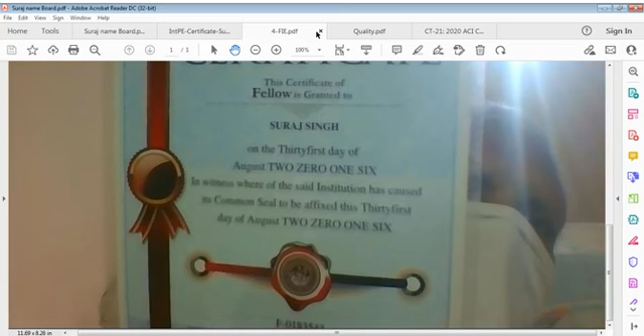And here is my quality file. I closed the C file and I closed the FI file, and I am here on the quality file. We discussed yesterday at length, but there is no end to this kind of file, because this reminds me every day. This reminds me and I remind you, and reminding objective is very important, because engineer means quality personnel.

Try to understand my point. When particularly I say engineers, this means a person with quality. Otherwise there does not exist any meaning to be called or named engineer. If a doctor, we call medical doctor, who is also a person of high quality. If a doctor cannot think of health of people, or doesn't think that medical service is a service, or it's a business - one of the two. When a doctor enters into business, in that case I cannot comment. But when a doctor serves as a professional for its patients, in that case I can say it's a quality doctor. Quality means highest character in profession. When I say quality engineer, it means highest profession, highest professional in engineering.

Quality is a term applied generally all over the world, and character is a term we can say is at a personal level. After all, every professional is personal first and then professional later on. So what is the position of your being personal is very much important, or you can say it can be used as measurement of your capability.

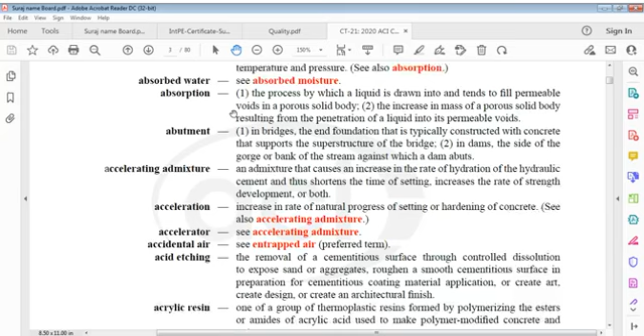Abrasion damage, abrasion resistance, absolute volume, absorbed moisture, absorption, abutment, accelerating admixture, acceleration, accelerator, accidental air - that is entrapped air - acid etching, and then acrylic resin, active crack addition, and then addition, adhesive, adiabatic, admixture, adsorbed water.

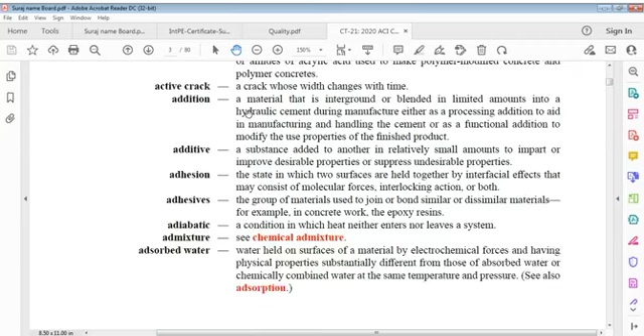Its molar or mass ratio of aluminum oxide Al2O3 to iron oxide Fe2O3 as in Portland cement. We have Abrams' law, which is a law stating that for given concrete materials and conditions of test, the ratio of amount of water to amount of cement in the mixture determines the strength of concrete, provided the mixture is workable.

Same way, as I say, abrasion damage is the wearing away of a surface by rubbing and friction, and abrasion resistance is the ability of a surface to resist being worn away by rubbing and friction. There is absolute volume: in the case of solids, the displacement volume of the particles themselves, including their permeable and impermeable voids, but excluding space between particles. In the case of fluids, the volume.

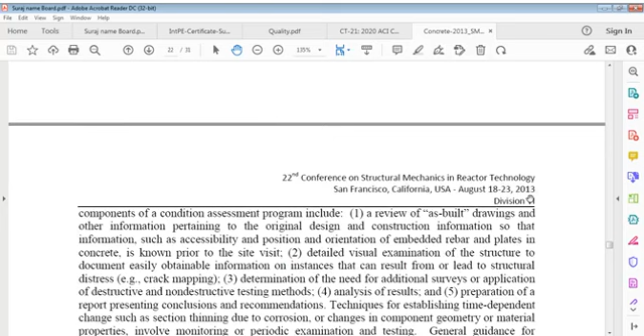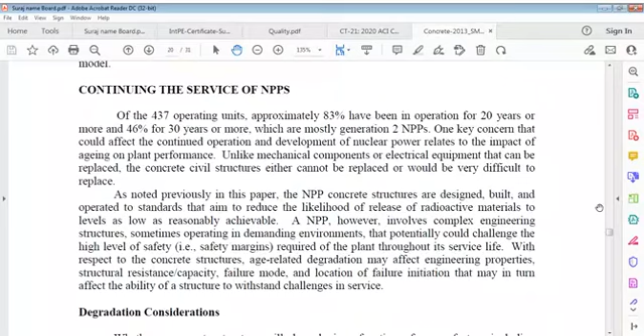It was not fully discussed because it's regarding quality of concrete, and we had a chance to look at it. I think we are somewhere here, continuing service of NPPS, continuing service of NPPS. So, degradation considerations, let's see what it was.

Thus, whether a concrete structure degrades is a function of many factors.

Let me switch off my battery so that this works safely, and then I'll listen up, please.

Cold, really, very cold. I did not show you the temperature, but it is normally not very good. It's really difficult for me to digest right now. Maybe not for you, but for me it is difficult. And 5 degrees, oh my god.

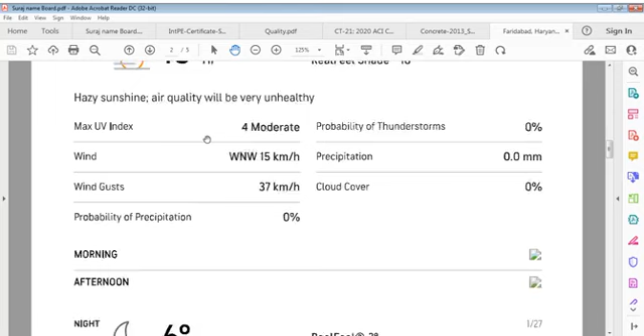12.2 kilometer is the cloud ceiling, visibility is okay, expected time in day is 18 degrees stalling, and next is 6. So currently, at this moment I'm talking to you, it's 5 degrees Celsius and feeling like 2 degrees Celsius, and that's why I was a little uncomfortable here.

And I close this. So we go through degradation considerations, and here we can say we have to find some information, concrete quality, which is really very important. Let us say what somebody says about concrete quality, how people think about it.

It simply says that quality of concrete is affected by different physical and mechanical properties of aggregate: shape, grading, durability, specific gravity, and water absorption, etc. These aggregate properties should be tested before using it for concrete production.

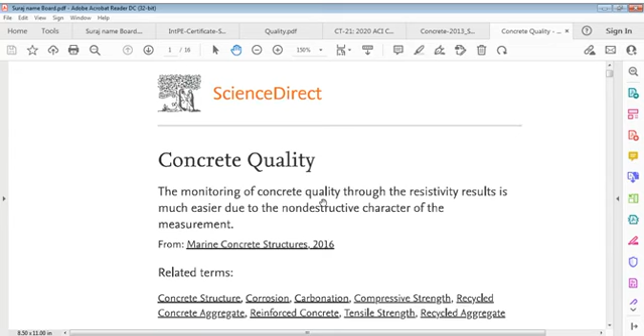Sometimes everything's not clear. Let's see here: concrete quality. Monitoring of concrete quality through resistivity result is much easier due to the non-destructive character of the measurement related terms. Okay, assessing a concrete's resistance to chloride ion ingress using formation factor.

Introduction: assessing concrete quality specifically to determine its resistance to ion ingress has gained increasing interest in recent decades.

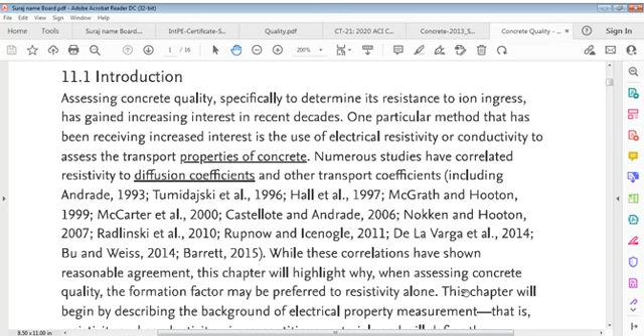One particular method receiving increased interest is use of electrical resistivity or conductivity to assess the transport properties of concrete. Numerous studies have correlated resistivity to diffusion coefficient and other transport coefficients. While these correlations have shown reasonable agreement, this page shall highlight why, when assessing concrete quality, formation factors may be preferred to resistivity alone.

This chapter begins by describing background of electrical property measurement, that is resistivity and conductivity, in cementitious materials, and shall define formation factor, a microstructural material property that describes pore network, which can then be related to diffusion coefficients of different ionic species.

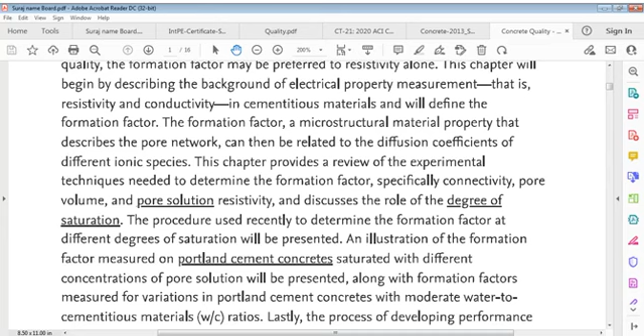Review of experimental technique needed to determine formation factors, specifically connectivity, pore volume and pore solution resistivity, and discusses role of degree of saturation, including procedure used recently to determine formation factors at different degrees of saturation.

An illustration of formation factor measured on Portland cement concretes saturated with different concentrations of pore solution is presented, along with formation factors measured for variations in Portland cement concretes with moderate water to cementitious material ratio.

Lastly, the process of developing performance ranges is discussed. An approximation utilizes surface concentration, reinforcement, cover depth, and formation factor to approximate a time to corrosion initiation. The remainder of the chapter discusses future research needs in advancing use of formation factor in specifying durable concrete materials.

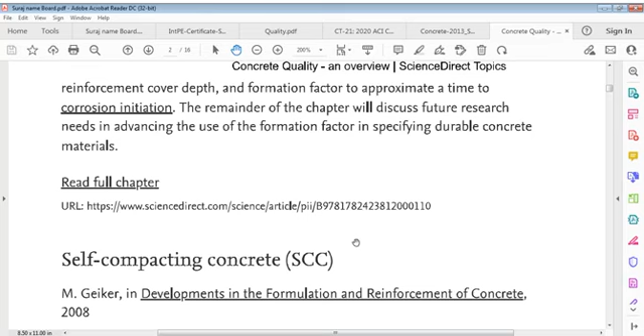Here is self-compacting concrete, Developments in the Formulation and Reinforcement of Concrete, 2008, regarding resistance to segregation.

Segregation significantly reduces concrete quality, which subsequently leads to problems during the service life of a structure. Segregation occurs when the coarse aggregates and fine aggregates separate.

Segregation is caused by differences in gravity of constituent materials.

Segregation may take place either during flow due to stress gradients, known as dynamic segregation, or as settlement due to gravity, known as static segregation. So one is due to flow of concrete and the other is due to gravity.

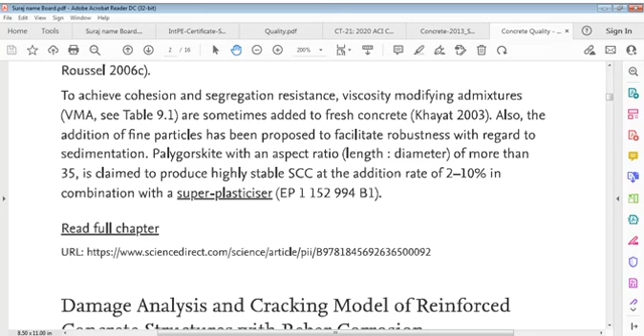Now we move to damage analysis and cracking model of reinforced concrete structures with rebar corrosion.

Effect of concrete quality: to examine the effect of concrete quality on expansive pressure, the same reinforced concrete example is used. Normally, tensile strength is considered to be a key factor in corrosion-induced cracking of concrete.

Concrete with a larger tensile strength always has a larger compressive strength, that's natural. We chose four compressive strengths rather than tensile strengths to illustrate the effect of concrete quality on expansive pressures, that is 25 MPa, 35 MPa, 45 MPa, and 55 MPa. All other parameters are the same as those mentioned.

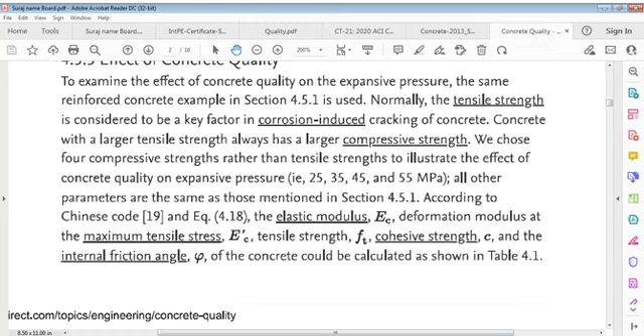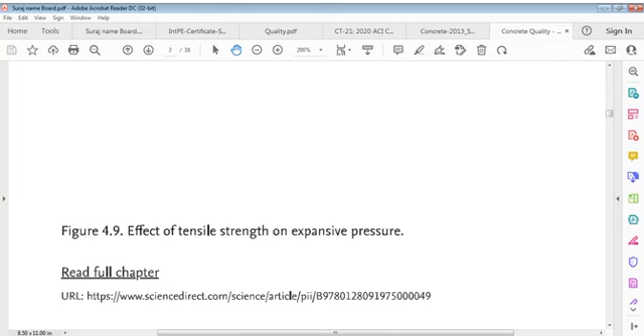Effect of tensile strength on expansive cover, that is expansive pressure. Evaluation of concrete quality using the lateral pressure test.

Evaluation in situ of concrete quality - uniformity, grade of deterioration, strength, etc. - becomes important when reinforced concrete structures present visible defects such as fissures, lack of mortar, or damage produced by fire. Evaluation of concrete in existing structures is generally made by determining compressive strength, as it reflects, directly or indirectly, most other concrete properties.

So it says that let me put up some page here. No, I can't put up this. Okay. Right. Well, so why I'm moving is here. It says

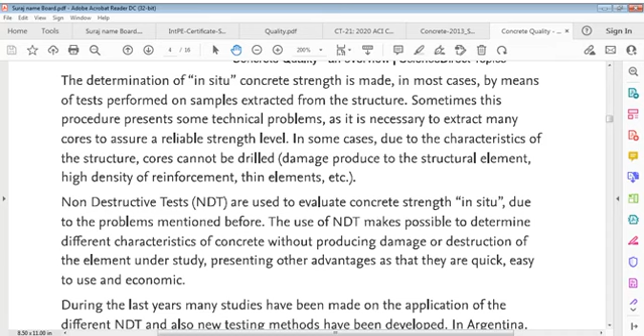Non-destructive tests (NDT) are used to evaluate concrete strength in situ due to the problems mentioned before. Use of NDT makes it possible to determine different characteristics of concrete without producing damage or destruction of the element under study, presenting other advantages such as being quick, easy to use and economical.

During recent years, many studies have been made on the application of different NDT methods, and new testing methods have also been developed. In Argentina, several NDT methods based on different theories of fracture were developed - methods of localized pressure, torsion, and lateral pressure can be mentioned.

It must be mentioned that using NDT available at present, absolute values of strength cannot be obtained. Nevertheless, some NDT methods quantify properties of concrete directly or indirectly related to mechanical strength, so strength can be estimated with errors that are acceptable.

In this paper, results of some studies performed with the method of lateral pressure are reported. Relationships between compressive strength and rupture loads quantified with NDT are established on concrete of different characteristics. Variables such as strength level, age, type of coarse aggregate, and curing of concrete are also analyzed.

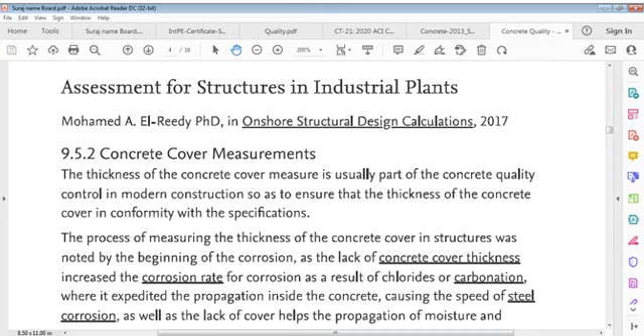Thickness of concrete cover measurement is usually part of concrete quality control in modern construction, so as to ensure the thickness of concrete cover is in conformity with specifications.

The process of measuring thickness of concrete cover in structures was noted as the beginning of corrosion control, as lack of concrete cover thickness increases corrosion rate, resulting from chlorides or carbonation, which expedites propagation inside concrete, increasing the speed of steel corrosion. Lack of cover also helps propagation of moisture and oxygen, which form the main basis for the corrosion process.

Measurement of concrete cover thickness explains causes of corrosion and identifies areas that have the capability to corrode faster.

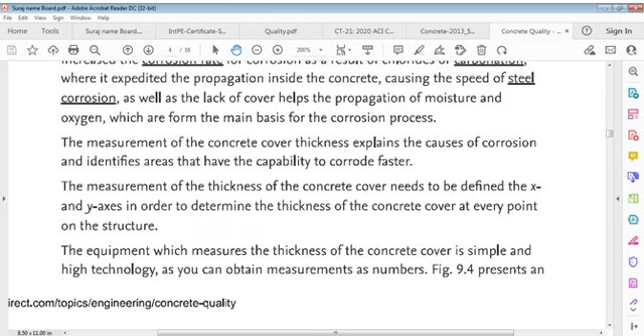Measurement of thickness of concrete covers needs defined x and y axes in order to determine thickness of concrete cover at every point of the structure. The equipment which measures thickness of concrete cover is simple yet high-technology, as you can obtain measurements as numbers.

Radiographs can be used on bridges but are quite expensive. The magnetic cover method is simple, but accuracy is affected by distance between steel bars, and when thickness of concrete cover is large, it significantly influences the readings.

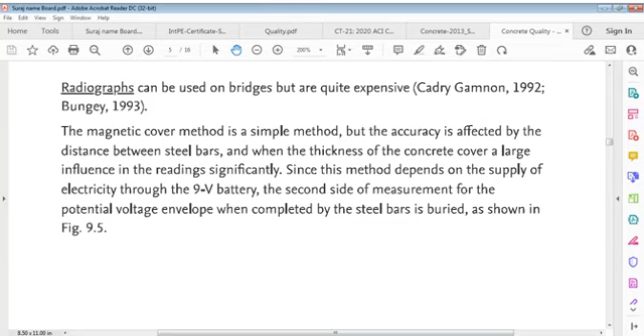Since this method depends on a supply of electricity through a 9-volt battery, the second side of the measurement for potential voltage envelope, when completed by steel bars, is buried as shown.

Device location on concrete surface shall increase accuracy of reading. Small head has an impact on accuracy of equipment.

Problem with this method is in case of dense steel reinforcement in concrete section, which gives non-accurate data. In this case, equipment shall be calibrated based on existing steel bars, as reading is affected by type of steel. Person who works on equipment must be competent and aware of whatever can affect reading, such as bolts, steel wires.

Sustainability of concrete.

Other approaches for improving sustainability described above are all perfectly feasible with our current understanding and technology at modest cost. However, there are a number of other strategies that might also be followed. These are not necessarily fully developed as yet, and may not be economically viable at this stage, but form at least a part of the roadmap for the future.

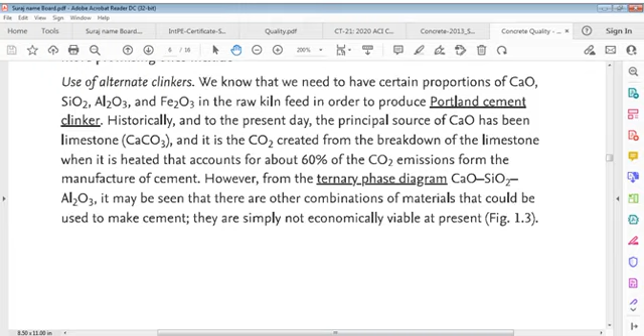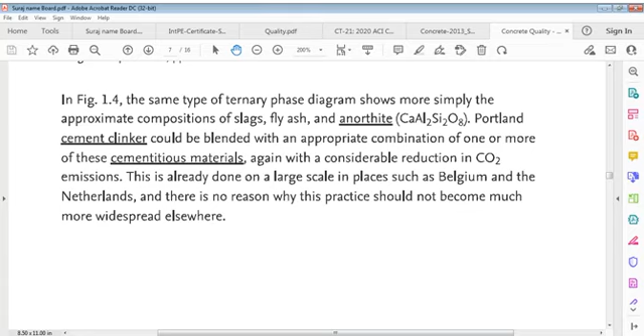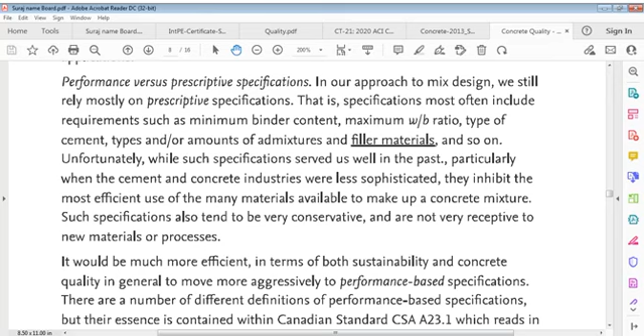Performance versus prescriptive specifications. In our approach to mix design, we still rely mostly on prescriptive specifications. That is, specifications most often include requirements such as minimum binder content, maximum water binder ratio, type of cement, types and/or amounts of admixtures and filler materials, and so on. Unfortunately, while such specifications served us well in the past, particularly when cement and concrete industries were less sophisticated, they inhibit the most efficient use of many materials available to make up concrete mixtures. Such specifications also tend to be very conservative and are not receptive to new materials or processes.

It would be much more efficient in terms of both sustainability and concrete quality in general to move more aggressively to performance-based specifications. There are a number of different definitions of performance-based specifications, but their essence is contained in the Canadian Standard CSA A23.1, which reads in part.

A performance concrete specification is a method of specifying a construction product in which the final outcome is given in mandatory language in a manner that performance requirements can be measured by accepted industry standards and methods. Processes, materials, or activities used by contractors, subcontractors, manufacturers, and material suppliers are then left to their discretion. The intent is clear: prescribe required properties of both fresh and hardened concrete, but without saying how they are to be achieved.

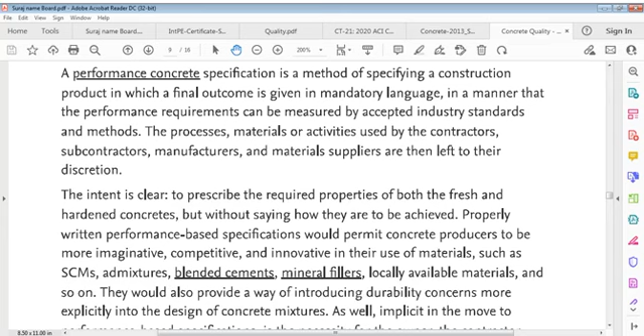Properly written performance-based specifications would permit concrete producers to be more imaginative, competitive and innovative in their use of materials, such as SCMs, admixtures, blended cements, mineral fillers, locally available materials, and so on. They would also provide a way of introducing durability concerns more explicitly into the design of concrete mixtures, as well as implicit in the move to performance-based specifications is the necessity for owner, contractor, and material supplier to work together.

Owner specifies required properties which could even include a carbon footprint. Supplier assumes responsibility for delivering appropriate concrete to site, and contractor assumes responsibility for placing and curing concrete properly.

Environmental degradation of reinforced concrete.

Low permeability concrete is a good one if low permeability is what's desired.

Traditionally, the first step in improving durability of reinforced steel involved improving concrete quality. For example, ACI 318 and ACI 357 recommend a water to cement ratio of 0.4 or under, and minimum cover of 50 mm for non-marine and 68 mm in marine exposures. ACI 318 2003, ACI 357 2003, and other codes such as Euro Code 2 and Norwegian Code NS 3474 are less stringent than the 1992 Norwegian Code.

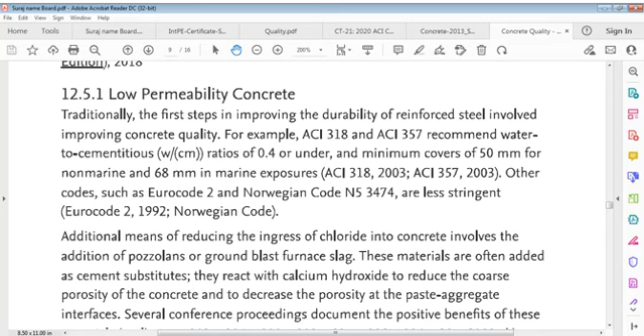Additional means of reducing ingress of chloride into concrete involves addition of pozzolans or ground blast furnace slag. These materials are often added as cement substitutes. They react with calcium hydroxide to reduce coarse porosity of concrete and to decrease porosity at the paste-aggregate interfaces.

Several conference proceedings document the positive benefits of these materials. However, numerous references show that even if concrete is produced to the most stringent of codes, chloride shall still ingress into concrete and corrosion of steel reinforcement shall initiate.

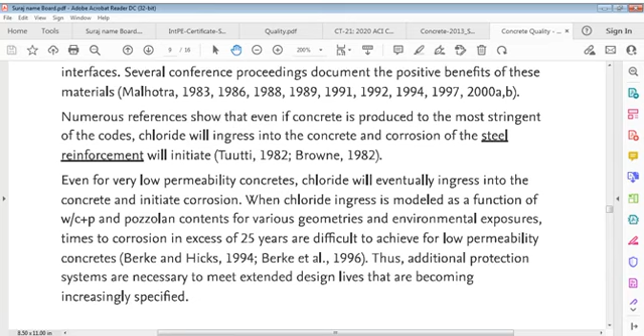Design and engineering of biogas plants: reactor material and protection. Digestion tanks of reinforced concrete and steel are most widely used.

Reinforced concrete tanks benefit from the high tensile strength of steel and the high compressive strength of concrete. Appropriate concrete quality, blast furnace cement with low lime content, and professional construction are important to prevent corrosion and leaks in tank walls.

Concrete digesters can be built partially or completely in the ground. Steel digesters are built on concrete foundations above ground. Steel plates are welded or bolted together and seams are tightened. For parts in contact with corrosive fluids, highest quality stainless steel is recommended. Glass-coated or galvanised steel is used when there is no risk of corrosion.

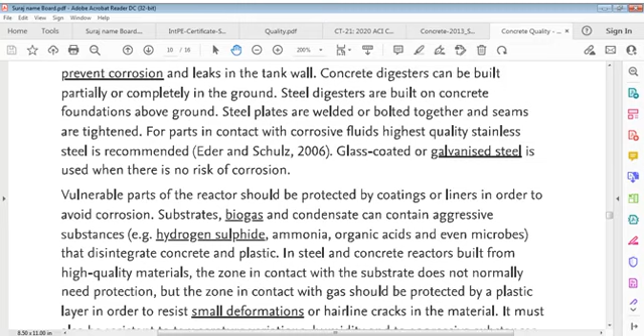Vulnerable parts of the reactor should be protected by coatings or liners in order to avoid corrosion. Substrates, biogas, and condensate can contain aggressive substances, namely hydrogen sulfide, ammonia, organic acids, and even microbes that disintegrate concrete and plastic.

In steel and concrete reactors built from high quality materials, the zone in contact with substrate does not normally need protection, but the zone in contact with gas should be protected by a plastic layer in order to resist small deformation or hairline cracks in materials. It must also be resistant to temperature variations, humidity, and aggressive substances that may be present within reactors.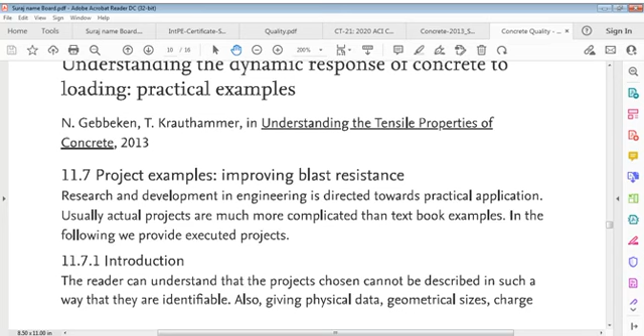Understanding the dynamic response of concrete to loading: practical examples. Project examples include improving blast resistance. Research and development in engineering is directed towards practical application. Usually, actual projects are much more complicated than textbook examples. In the following, we provide executed projects.

Our reader should understand that the projects chosen cannot be described in such a way that they are identifiable. Also, giving physical data, geometrical sizes, charge weights, or concrete quality is avoided. These examples show the practical importance of concrete material for protective structures, including mitigation of explosive effects using sandwich walls.

Mitigation of explosive effects using sandwich walls. This project had two objectives: firstly, to assess an existing building, and secondly, if necessary, design it to be blast resistant. For the existing building, the threat level led to an assessment that the structure was not strong enough. Therefore, a new design had to be developed without changing the original architectural layout.

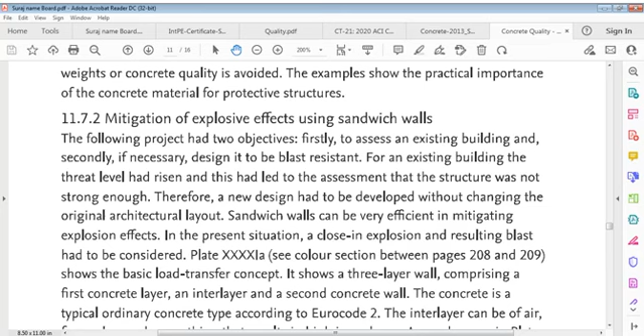The concrete is typical ordinary concrete, type according to Eurocode 2. The interlayer can be air, foam, dry sand, or whatever results in low impedance. As can be seen, the blast wave hits the first concrete wall coming from the left, resulting in a compressive shock wave traveling through the material. At the interface between the first concrete wall and the interlayer, part of the shock wave is transmitted into the interlayer depending on impedance, and part is reflected as a tensile wave.

The ratio of transmitted and reflected shock waves depends on the impedance ratio. Impedance is defined as the product of density and wave velocity. Concrete has a density of roughly 2500 kg per cubic meter.

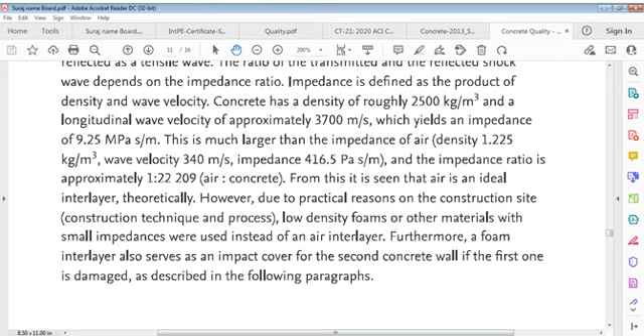We observe significant damage indicated by the red colour, showing energy dissipation in the first concrete wall. The reflected tensile wave at the rear face of the first concrete wall results in tensile stresses in the concrete material which can be much larger than the dynamic ultimate tensile strength of concrete. This leads to scabbing failure on the rear face of the first concrete wall.

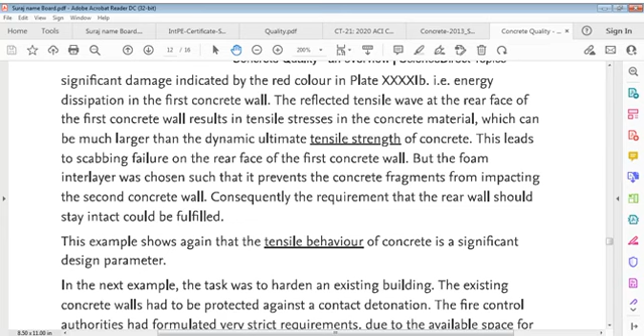In the next example, the task was to harden an existing building. Existing concrete walls had to be protected against a contact detonation. Fire control authorities had formulated very strict requirements due to the available space for hardening measures. In addition, the protection requirement for the existing wall allowed for acceptance of certain damage. Therefore, a high strength, high ductility concrete was developed and analyzed.

Again, a layered sandwich wall subject to contact detonation. The left design is high strength, high ductility protection wall, right is numerical simulation. High strength, high ductility concrete wall will be described in the following section. Result is shown on the right.

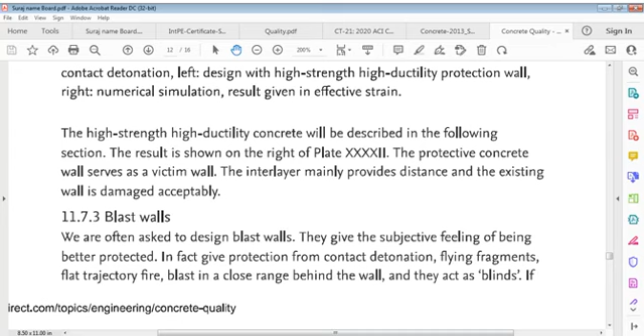Blast walls. We are often asked to design blast walls. They give a subjective feeling of being better protected. In fact, they give protection from contact detonation, flying fragments, flat trajectory fire, and blast in a close range behind the wall, and they act as blinds if they have to be designed in an urban environmental situation where, in addition, the requirements from monument conservation authorities exist.

Even design of concrete foundation can become a complicated task if trees have to be preserved, or if supply and waste lines cross the foundation.

A solution was chosen after several options were studied. Foundations are made of ordinary reinforced concrete carrying clamped steel posts. High strength and high ductility concrete panels protect from blast, contact detonation, and impact. Because of their ductility, they can develop good flexural behavior and consequently achieve membrane actions.

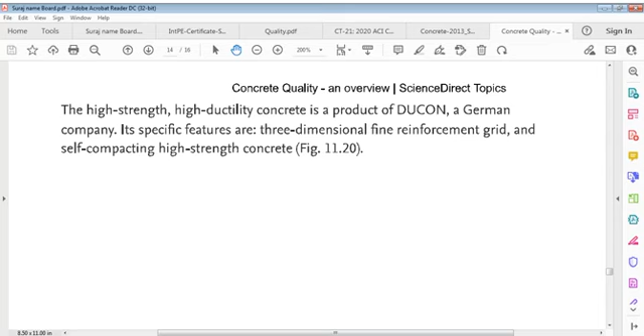High strength, high ductility concrete is a product of DUCON, a German company. I'm not commercially interested in this. This is DUCON self-compacting concrete micro mat.

Compression strength goes up to 200 MPa and tensile strength reaches 75 MPa, which is roughly 40% of compressive strength. Therefore, such materials can be favorably used where high tensile resistance is required.

Initial general studies provided an overall blast situation, including exterior and interior explosions. Based on these studies, doors, windows, openings, and facades were investigated individually. In addition, numerous detonations on load-bearing structures were investigated numerically. Relevant portions were cut out of the structure in order to model representative substructures and underground car parks subject to a car bomb.

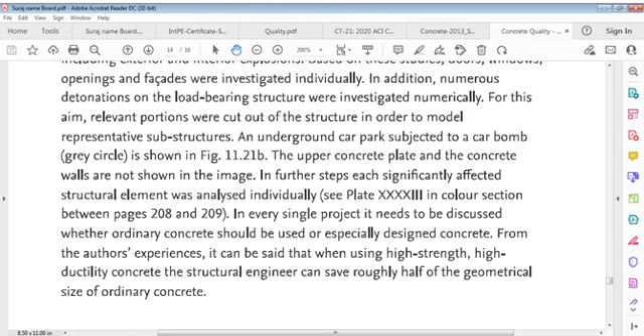Upper concrete plates and concrete walls are not shown. In further steps, each significantly affected structural element was analyzed. In every single project, it needs to be discussed whether ordinary concrete should be used or specially designed concrete. From the authors' experience, using high strength, high ductility concrete, the structural engineer can save roughly half of the geometric size compared to ordinary concrete.

Caution: at the end of the study, results were discussed with the structural engineer, who is normally different from the safety engineer. Consequences for the load-bearing structure were assessed in order to avoid partial or entire collapse. These results were communicated to the architect.

All right, now I'll just save this page for reference in future if required. It's better to keep a record of such things. Okay, now what to do? Just a minute please. Let me just hold it.

Just a minute, let me save it and close it, then no problem. I close it twice. So degradation consideration we're talking, and let me see if we can get more information from this page. That is concrete quality, and I go to this, which is corrosion of steel and concrete structures. Let us see.

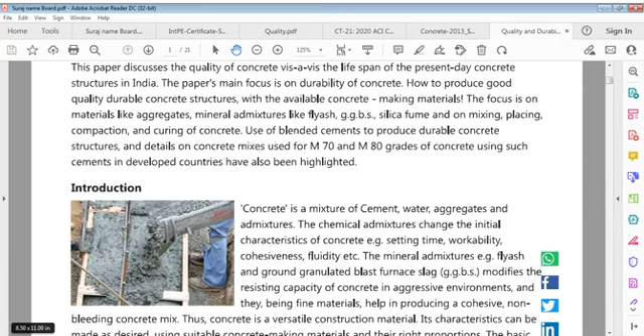Concrete is a mixture of cement, water, aggregate and admixtures. Chemical admixtures change initial characteristics of concrete, namely setting time, workability, cohesiveness, fluidity. Mineral admixtures, namely fly ash and ground granulated blast furnace slag, modify resisting capacity of concrete in aggressive environments.

Thus, concrete is a versatile construction material. Its characteristics can be made as desired. Using suitable concrete making materials and their right proportions, basic characteristics of concrete, that is workability, fluidity and cohesiveness, and 28 days compressive strength, can be obtained as desired using suitable proportions of constituent materials.

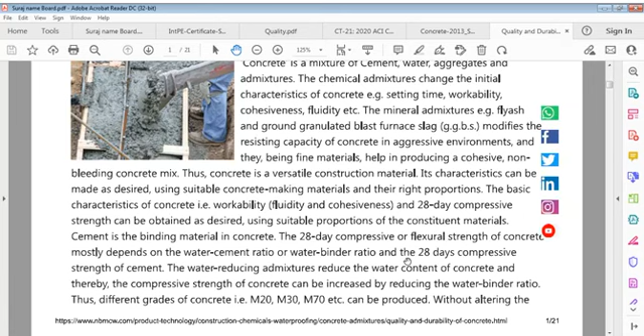Thus, different grades of concrete, M20, 30, 70, etc. can be produced without altering water content or water binder ratio for a particular grade of concrete.

Workability of concrete can be increased with use of superplasticizers, thus in heavily reinforced concrete sections, high workability concrete can be placed without much compacting efforts. In mass concrete structures, bigger size of coarse aggregate are used. Air entraining admixtures are used to produce cohesive concrete mix in such cases.

Mineral admixtures like fly ash or GGBS reduce heat inside concrete. Thus, PPC containing fly ash or PSC containing GGBS can be used as low heat cement for producing very high strength concrete, say M80.

Efficient superplasticizers reducing 30 to 35% of mixing water may be required. Along with high strength OPC, mineral admixture silica fume, 8 to 10% by weight of cement, shall also be required to produce such high strength concrete. Silica fume concrete is also abrasion resistant and therefore is being used in construction of spillways of concrete dams.

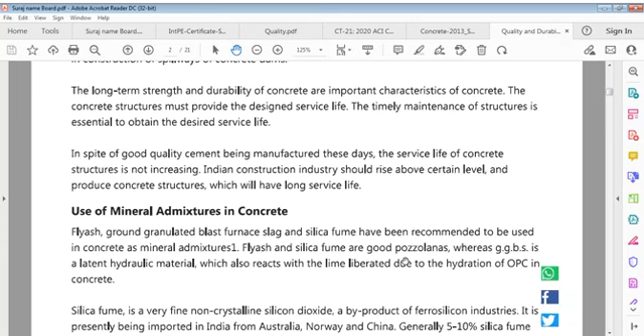Use of mineral admixtures in concrete, fly ash, ground granulated blast furnace slag, and silica fume have been recommended to be used in concrete as mineral admixtures. Fly ash and silica fume are good pozzolanas, whereas GGBS is a latent hydraulic material which also reacts with lime liberated due to hydration of OPC in concrete.

Silica fume is very fine, non-crystalline silicon dioxide, a byproduct of ferrosilicon industries. It is presently being imported in India from Australia, Norway and China. Generally 5 to 10% silica fume by weight of cement is sufficient to produce high strength concrete, M60 grade and above.

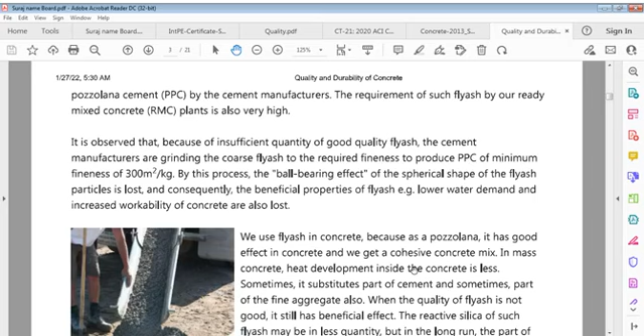It's observed that because of insufficient quantity of good quality fly ash, cement manufacturers are grinding coarse fly ash to required fineness to produce PPC, Portland pozzolana cement, of minimum fineness of 300 meters square per kilogram. This is pozzolana cement, that is PPC, as I said.

Portland pozzolana cement - it's observed that because of insufficient quantity of good quality fly ash, cement manufacturers are grinding coarse fly ash to required fineness to produce PPC of minimum fineness 300 square meters per kilogram. By this process, the ball bearing effect of spherical shapes of fly ash particles is lost, and consequently beneficial properties of fly ash, namely lower water demand and increased workability of concrete, are lost.

We use fly ash in concrete because as a pozzolana it has good effect in concrete and you get a cohesive concrete mix. In mass concrete, heat development inside concrete is less. Sometimes it substitutes part of cement and sometimes part of fine aggregate also.

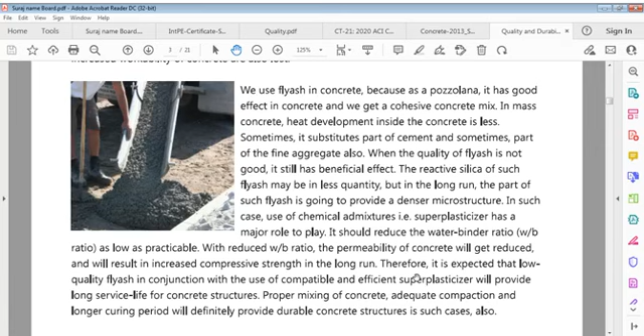In such case, use of chemical admixture, that is superplasticizer, has a major role to play. It should reduce water binder ratio as low as practicable. With reduced water binder ratio, permeability of concrete gets reduced and results in increased compressive strength in the long run. Therefore, it is expected that low quality fly ash in conjunction with use of compatible and efficient superplasticizer shall provide long service life for concrete structures.

What is expected is low quality fly ash in conjunction with use of compatible and efficient superplasticizer provides long service life for concrete structures. Proper mixing of concrete, adequate compaction, and longer curing period definitely provide durable concrete structures in such cases also.

Mineral admixtures, that is fly ash, GGBS, and silica fume, being very fine particles, their uniform blending with cement and aggregates in ordinary drum mixers cannot be ensured. In most of our construction sites, batching and mixing plants are not available.

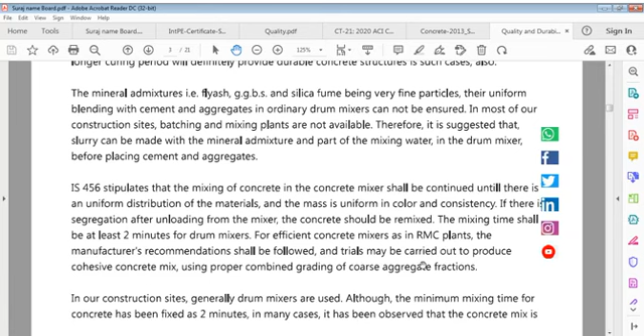IS 456 stipulates that mixing of concrete in a concrete mixer shall be continued until there is achieved uniform distribution of materials and the mass is uniform in color and consistency. If there is segregation after unloading from the mixer, concrete should be remixed.

Mixing time shall be at least 2 minutes for drum mixers. For efficient concrete mixers, as in RMC plants, manufacturers' recommendations shall be followed and trials may be carried out to produce a cohesive concrete mix using proper combined grading of coarse aggregate fractions.

In our construction sites, generally drum mixers are used. Although minimum mixing time for concrete has been fixed at 2 minutes, in many cases it has been observed that the concrete mix is not a cohesive one and is not uniform in color and consistency.

A cohesive, that is not segregative, concrete mix can only be placed properly in formwork and compacted well. This process of placing a cohesive mix around reinforcement, fully compacted and finished well, has got considerable influence on durability of concrete. Adequate cover to reinforcement, dense concrete cover, and well compacted concrete cover shall not get carbonated during its service life.

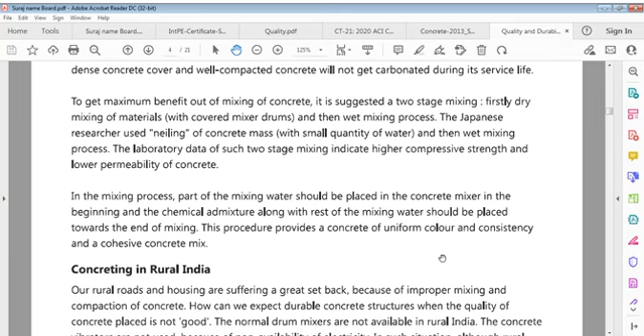Housing is suffering a great setback because of improper mixing and compaction of concrete. How can we expect durable concrete structures when the quality of concrete placed is not good?

Normal drum mixers are not available in rural India. Concrete vibrators are not used because of non-availability of electricity. In such situations, although rural concrete roads are supposed to be of M30 grade and RC slabs in houses are supposed to be of M20 grade.

The real scenario is terrible, with hand mixing of concrete and rodding of concrete in formwork. No durable concrete can be produced. The result is a shorter lifespan of concrete structures.

In rural India, diesel-operated concrete mixers and vibrators can be used to produce a cohesive concrete mix and place it compacted efficiently. However, if hand mixing is the only alternative, 10% extra cement should be added to the concrete mix and mixing time should be increased in order to obtain a cohesive concrete mix.

Lifespan of concrete structures: in India, we design buildings for a lifespan of about 50 to 60 years. Bridges are designed for about 100 years, while concrete dams are designed for about 150 years. Delhi Metro structures have been designed for 120 years. The Eurotunnel connecting England and France undersea has been designed for 120 years.

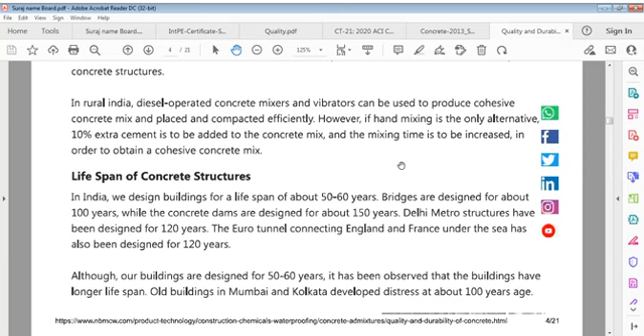With availability of good construction materials in present day, our structures should provide longer service life, provided we build them with adequate care, using proper methods of mixing, placing, compaction and curing of concrete.

In addition to mineral admixtures like fly ash, GGBS and silica fume, chemical admixtures, namely superplasticizers, provide required workability and compressive strength of concrete. But because both cement and chemical admixtures are chemicals, their compatibility must be ensured before use.

Fortunately, a large number of chemical admixture companies are operating in our country, especially in cities, and materials like plasticizers, superplasticizers of normal and retarding type, and accelerating and retarding admixtures are available in good quality and quantity. Only if their proper doses and compatibility with different types of cement are ensured can they provide a cohesive, workable concrete mix, which can be placed comfortably in formwork and compacted well.

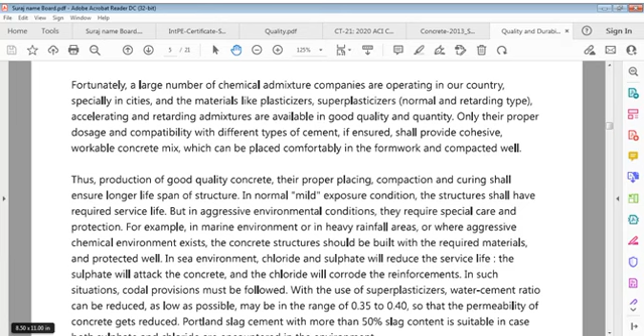Thus, production of good quality concrete with proper placing, compaction and curing shall ensure longer lifespan of structures. In normal mild exposure conditions, structures shall have the required service life, but in aggressive environmental conditions, these require special care and protection. For example, in marine environment, heavy rainfall areas, or aggressive chemical environments, concrete structures should be built with required materials and protected well.

In sea environments, chloride and sulfate reduce service life. Sulfate attacks concrete and chloride corrodes reinforcement. In such situations, codal provisions must be followed.

With use of superplasticizers, water cement ratio can be reduced as low as possible, maybe in the range of 0.35 to 0.4, so that permeability of concrete gets reduced. Portland slag cement with more than 50% slag content is suitable in cases where both sulfate and chlorides are encountered in the environment.

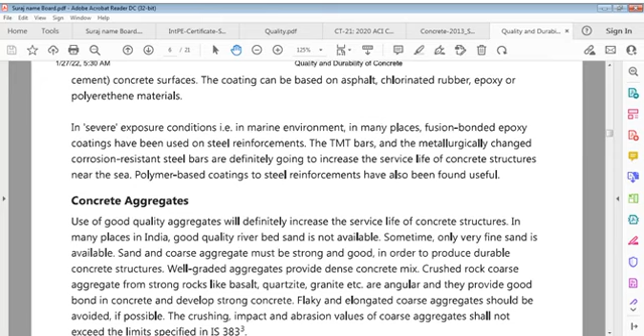Concrete aggregates: use of good quality aggregates definitely increases the service life of concrete structures. In many places in India, good quality riverbed sand is not available; sometimes only very fine sand is available. Sand and coarse aggregate must be strong and good. In order to produce durable concrete structures, well-graded aggregates provide a dense concrete mix.

Crushed rock coarse aggregate from strong rocks like basalt, quartzite, granite, etc. are angular, and they provide good bond in concrete and develop strong concrete. Flaky and elongated coarse aggregates should be avoided if possible. Crushing, impact and abrasion values of coarse aggregates shall not exceed limits specified in IS 383.

Fine aggregates should generally be of grading zone 2 or grading zone 3.

For very high strength concrete, coarse graded fine aggregate, zone 1 is suitable. Sometimes riverbed sand is not available, so we use crushed stone fine aggregate. They can also produce good quality dense concrete, provided their grading is satisfactory. Deleterious materials like clay, lump, coal, lignite, shale and soft fragments should be avoided. Use of good quality well-graded coarse and fine aggregate definitely increases service life of concrete structure.

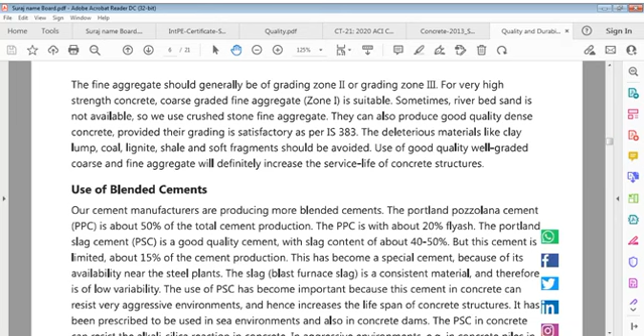Use of blended cement: our cement manufacturers produce more blended cements. Portland pozzolana cement is about 50% of total cement production, with about 20% fly ash. Portland slag cement is a good quality cement with slag content of about 40 to 50%, but this cement is limited, about 15% of cement production. It has become a special cement because of its availability near steel plants. Slag, blast furnace slag, is a consistent material and therefore is of low variability.

Use of PSC has become important because this cement in concrete can resist very aggressive environments and hence increases lifespan of concrete structures. It has been prescribed for use in sea environments and also in concrete dams. PSC in concrete can resist alkali-silica reaction. In aggressive environments, namely in concrete piles in sea environment in Gujarat, PSC with 70% slag has been used to produce high workability M40 grade concrete. The mix proportions used are as follows.

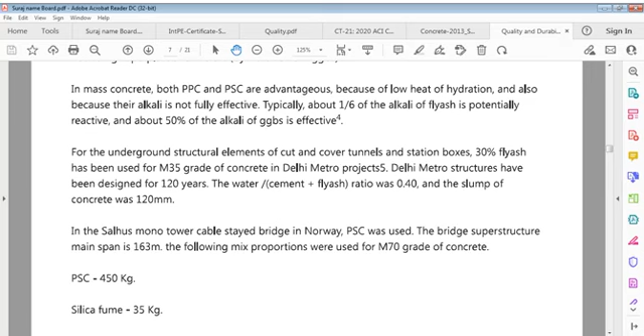For underground structural elements of cut and cover tunnels and station boxes, 30% fly ash has been used for M35 grade concrete in Delhi Metro projects. Delhi Metro structures have been designed for 120 years. Water cement fly ash ratio was 0.4, and slump of concrete was 120 mm.

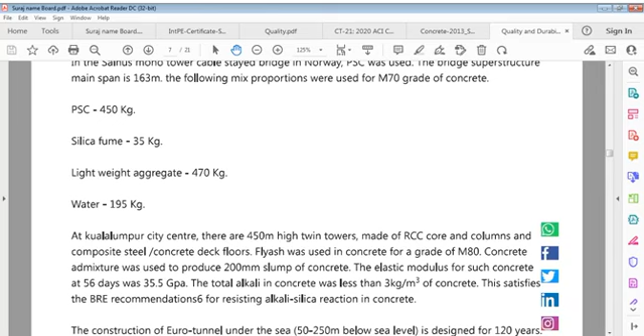In Salhus mono tower cable stayed bridge in Norway, PSC was used for the bridge superstructure; main span is 163 meters. The following mix proportions were used for M70 grade concrete: PSC 450 kg, silica fumes 35 kg, less than 10%. This is about 8%. Lightweight aggregate 470 kg, and water 195 kg. So it's about 450, 35, 45, so about that.

At Kuala Lumpur city center, there are 450 meter high twin towers made of RCC core and columns and composite steel concrete deck floors. Fly ash was used in the concrete. For a grade of M80, concrete admixture was used to produce 200 mm slump of concrete. Elastic modulus of such concrete at 56 days was 35.5 GPa. Total alkali in concrete was less than 3 kg per meter cube of concrete. This satisfies BRE recommendations for resisting alkali silica reactions in concrete.

Construction of the Eurotunnel under sea, 50 meters below sea level, is designed for 120 years. Each tube is composed of rings made of 5 segments. There are a total of 226,000 segments and 500,000 meter cube of concrete used.

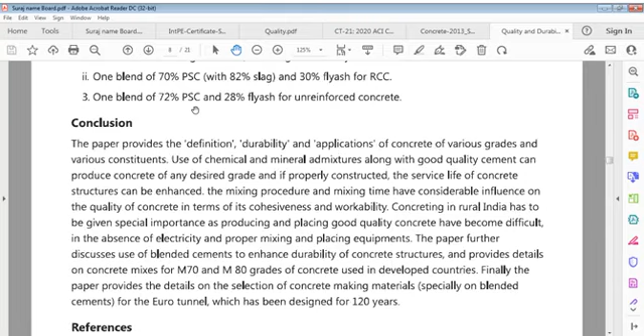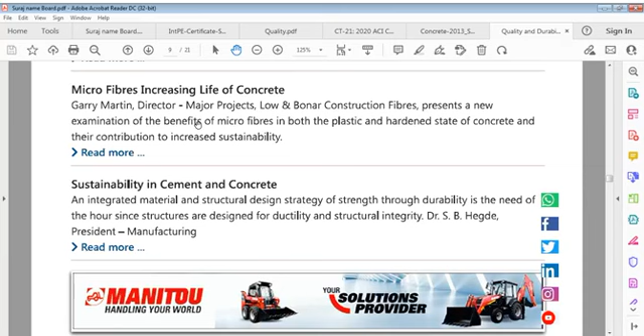Microfibers increasing life of concrete. Garry Martin, Director, Major Projects, Low & Bonar Construction Fibres. This is all alternatives.

Ready-mix concrete helping construction achieve standards.

This is something that is reasonable there. No, I think there's nothing in this. It's all commercial, I'm not interested in that. So nothing really, commercial is not important for us. Let us just, if I can save this, let me say for record purpose. Save as we can say for record purpose only. Concrete I can write for our reference only.

Alright, I close this file as well now, and let's go back to our program as I said here. Now I'll go back to this.

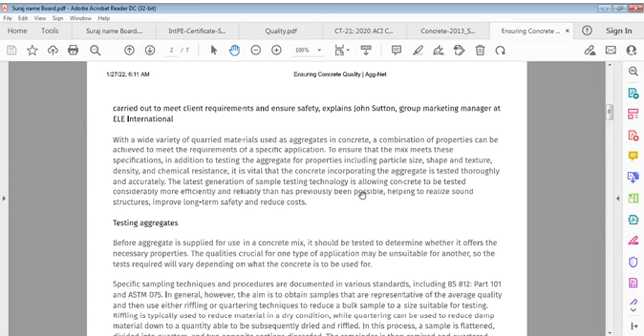Okay, let's see. With a wide variety of quarried materials used as aggregates in concrete, a combination of properties can be achieved to meet requirements of a specific application. To ensure that mix meets these specifications, in addition to testing aggregate for properties including particle size, shape and texture, density and chemical resistance, it's vital that concrete incorporating aggregate is tested thoroughly and accurately. Latest generation of sample testing technologies allow concrete to be tested considerably more efficiently and reliably than has previously been possible, helping to realize sound structures, improve long-term safety and reduce cost.

So it is about, with a wide variety of quarried material used as aggregate in concrete, combination of properties can be achieved to meet requirements of specific application. To ensure that mix meets these specifications, in addition to testing of aggregate for properties including particle size, shape and texture, density and chemical resistance, it's vital that incorporating aggregate is tested thoroughly and accurately. Latest generation of sample testing technologies allowing concrete to be tested considerably more efficiently and reliably than has previously been possible, helping to realize sound structures, improve long-term safety and reduce cost.

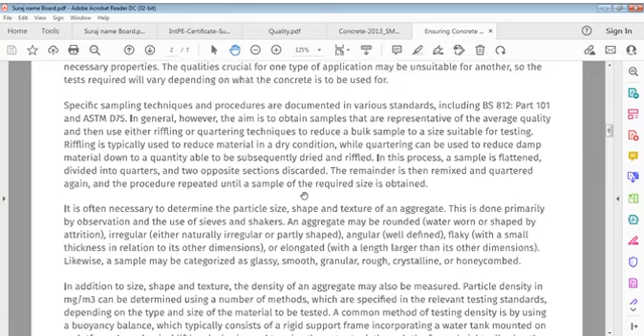It's often necessary to determine the particle size, shape, and texture of aggregate. This is done primarily by observation and use of sieves and shakers. An aggregate may be rounded, water-worn, or shaped by attrition; irregular, either naturally irregular or partly shaped; angular, well-defined; flaky, with small thickness in relation to its other dimensions; or elongated, with a length larger than its other dimensions. Likewise, a sample may be categorized as glassy, smooth, granular, rough, crystalline, or honeycombed.

In addition to size, shape, and texture, density of an aggregate may also be measured. Particle density in milligrams per meter cubed can be determined using a number of methods which are specified in relevant testing standards, depending on the type and size of material to be tested.

A common method of testing density is by using a buoyancy balance, which typically consists of a rigid support frame incorporating a water tank mounted on a platform. A mechanical lifting device is used to raise the water tank through the frame, allowing specimens suspended below the balance to be weighed in air and water.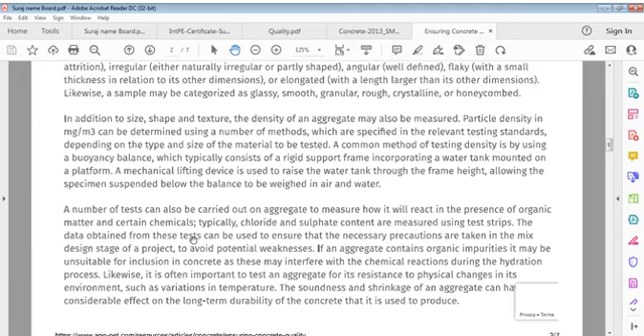A number of tests can be carried out on aggregate to measure how it will react in the presence of organic matter and certain chemicals. Typically, chloride and sulfate content are measured using test strips. Data obtained from these tests can be used to ensure that necessary precautions are taken at the mix design stage of a project, to avoid potential weakness. If an aggregate contains organic impurities, it may be unsuitable for inclusion in concrete, as these may interfere with chemical reactions during the hydration process.

Likewise, it's often important to test an aggregate for its resistance to physical changes in its environment, such as variations in temperature. Soundness and shrinkage of an aggregate can have a considerable effect on the long-term durability of the concrete that it is used to produce.

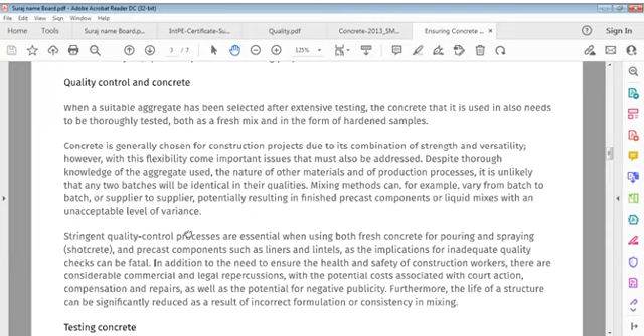Quality control and concrete. When a suitable aggregate has been selected after extensive testing, the concrete that is used also needs to be thoroughly tested, both as a fresh mix and in the form of hardened samples.

Concrete is generally chosen for construction projects due to its combination of strength and versatility. However, with this flexibility come important issues that must also be addressed. Despite thorough knowledge of the aggregate used, the nature of other materials, and the production processes, it is unlikely that two batches would be identical in their qualities. Mixing methods can, for example, vary from batch to batch or supplier to supplier, potentially resulting in finished precast components or liquid mixes with an unacceptable level of variance.

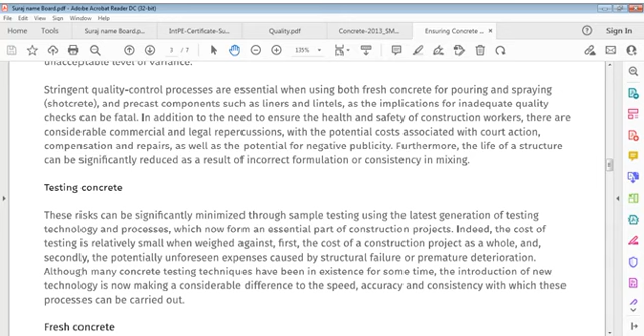Stringent quality control processes are essential when using both fresh concrete for pouring and spraying, shotcrete, and precast components such as liners and lintels, as implications for inadequate quality checks can be fatal. In addition to the need to ensure health and safety of construction workers, there are considerable commercial and legal repercussions with potential costs associated with court action, compensation and repairs, as well as potential for negative publicity. Furthermore, the life of a structure can be significantly reduced as a result of incorrect formulation or consistency in mixing.

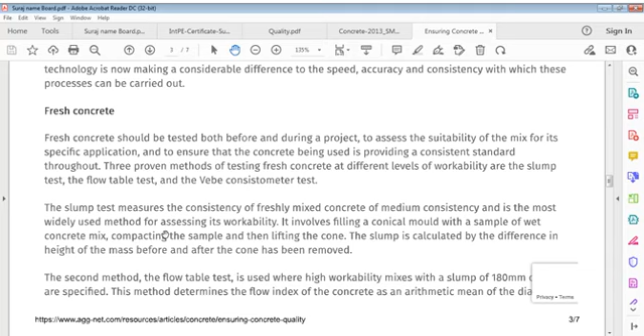The second method, the flow table test, is used when high workability mixes with a slump of 180 mm are specified. This method determines the flow index of concrete as an arithmetic mean.

A third test of fresh concrete is the Vebe consistometer test, which is generally used with particularly stiff mixes. This test begins with the slump test as above, in which the result shall be virtually zero. The sample is then subject to vibration in a cylinder, and the time taken for the sample to mold itself to the cylinder is measured. The longer the time in seconds measured, the higher the Vebe degrees and the lower the workability.

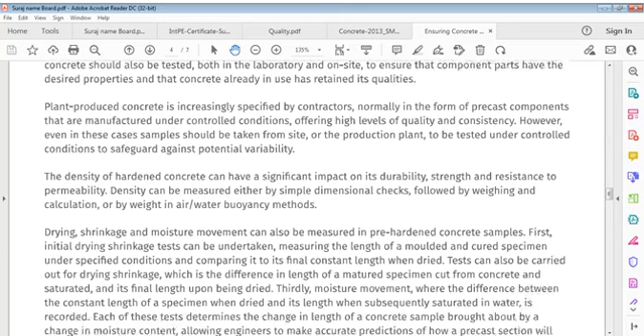Plant-produced concrete is increasingly specified by contractors, normally in the form of precast components that are manufactured under controlled conditions, offering high levels of quality and consistency. However, even in these cases, samples should be taken from site or production plant to be tested under controlled conditions to safeguard against potential variability.

Density of hardened concrete can have a significant impact on its durability, strength, and resistance to permeability. Density can be measured either by simple dimensional checks, followed by weighing and calculations, or by weight in air and water buoyancy methods.

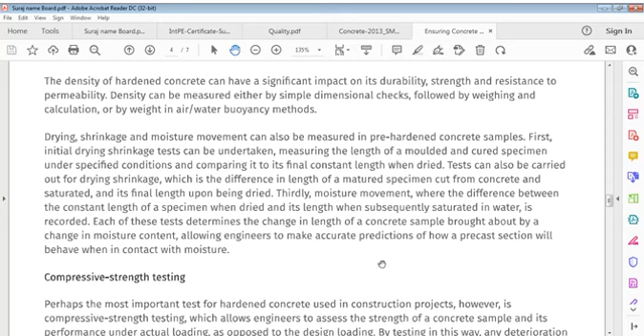Drying, shrinkage, and moisture movement can also be measured in pre-hardened concrete samples. First, an initial drying shrinkage test can be undertaken measuring the length of a molded and cured specimen under specified conditions and comparing it to its final constant length when dried.

Tests can also be carried out for drying shrinkage, which is the difference in length of a matured specimen cut from concrete and saturated, and its final length upon being dried. Thirdly, moisture movement, where the difference between the constant length of a specimen when dried and its length when subsequently saturated in water is recorded. These tests determine the change in length of a concrete sample brought about by change in moisture content, allowing engineers to make accurate predictions of how a precast section will behave when in contact with moisture.

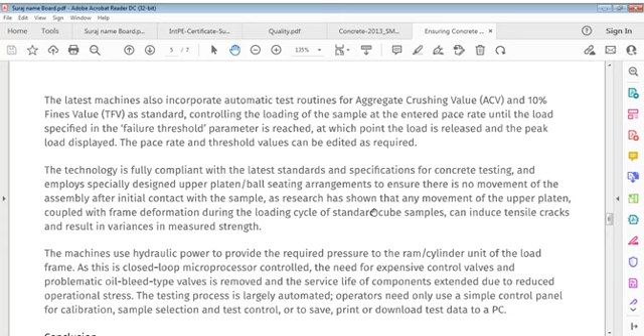The technology is fully compliant with the latest standards and specifications for concrete testing, and employs specially designed upper platen ball seating arrangements to ensure there is no movement of the assembly after initial contact with the sample. Research has shown that any movement of the upper platen, coupled with frame deformations during the load cycle of standard cube samples, can induce tensile cracks.

These machines use hydraulic power to provide the required pressure to the ram cylinder unit of the load frame. As this is closed loop microprocessor controlled, the need for expensive control valves and problematic oil bleed type valves is removed, and the service life of components is extended due to reduced operational stress.

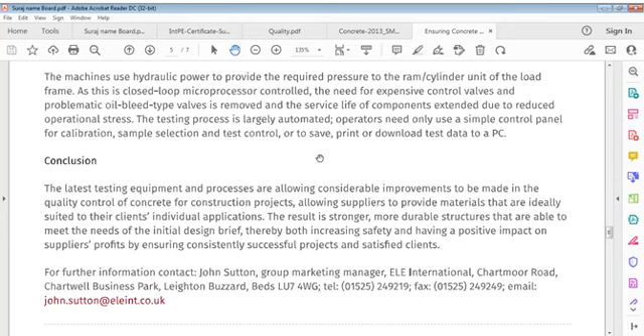In conclusion, the latest testing equipment and processes are allowing considerable improvements to be made in quality control of concrete for construction projects, allowing suppliers to provide materials that are ideally suited to their clients' individual applications. The result is stronger, more durable structures that are able to meet the needs of the initial design brief, thereby both increasing safety and having a positive impact on suppliers' profits by ensuring consistently successful projects and satisfied clients.

Well, I think we have gone through the paper. We may like to go also. I think I should save this also, better. I think I better save it for reference, in case some question comes. So I say concrete.

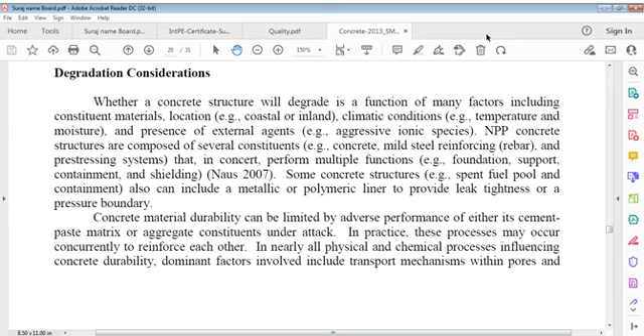I can save it better. Alright, so this is saved. I'll now close this paper, we have gone through it. Now this page, I'll close this file as well.

And this quality we have discussed partly today, and we have to see now. It's about just a review that we have conducted today about the concrete issue, which is an important one. Concrete quality that we are concerned with, as I said in the quality file, it's not easy to digest that. As I said in this file, that is: get up quality, stop sleeping. This was my title, something different, you can say, not as usual before.

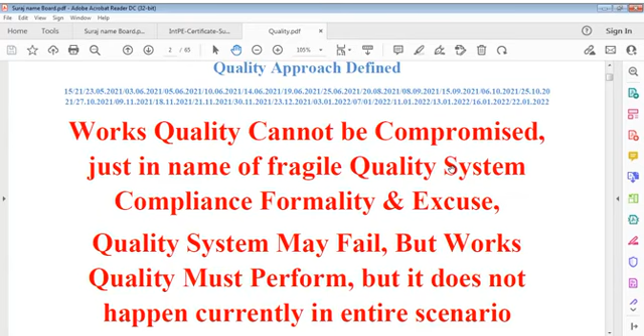Sleeping and fix quality in Bharat, India, because work quality cannot be compromised in the name of fragile quality system, compliance, formality and excuse. Quality system may fail, but work quality must perform. But this doesn't happen currently in the entire scenario. So my direction is: get up quality, stop sleeping, and you have to say this.

You have to say something. And fix quality in Bharat, India, that we have to do. Engineers have to do it. Get up quality, stop sleeping, and fix quality in our country. And that's why it's about having active quality performing application. That is, you can say, it's kind of funny as well as sunny, both. And red lines to be resolved based on this.

And we have to ask ourselves, can we bring the working environment to quality requirements? If yes, how to do that? That's an important point we have to see here. And I can say, time never stops, we stop. Mind never stops, we stop. Thinking never stops, we stop. Because we are physical beings, we have some limitations, but mind, time, all these don't have any limitation. We have to be a little pragmatic in this regard.

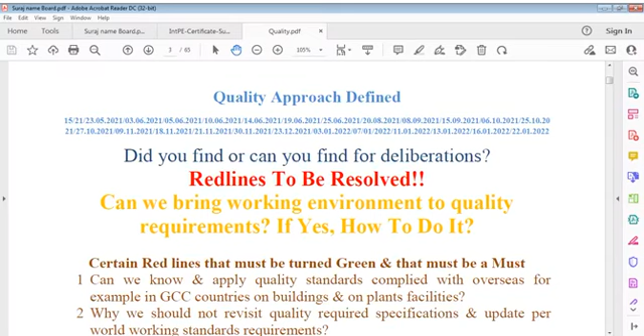Just as I said, certifications are indicative only, and we have to indicate them. That's indeed true, we have to indicate them, and we have to use them also. We have to indicate them as fine work, and we have to use them also as our work, and there is no way we can run away from that. So I can say: get up quality, stop sleeping; get up design, stop sleeping; do their job. That's where we stand now.